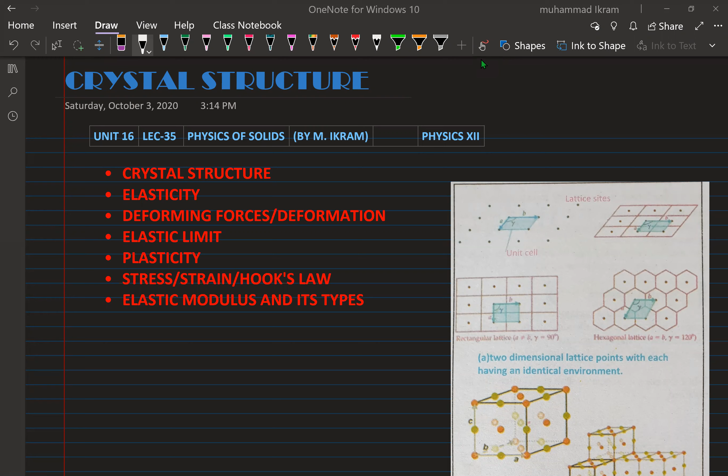Today is our lecture number 35, Unit 16, Physics of Solids. In our today lecture, I will tell you about the crystal structure, elasticity, deforming forces, deformation, elastic limit, plasticity, stress, strain, Hooke's law, elastic modulus and its types. These are today's topics. So let us start with our topic today.

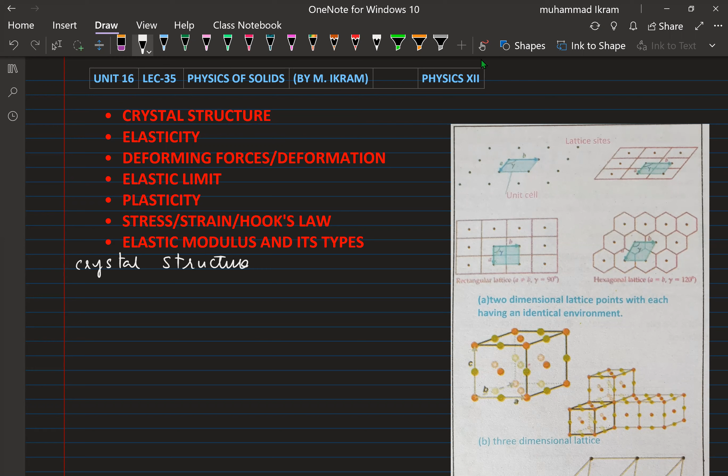First of all, about the crystal structure. The crystal structure is revealed through the process of X-ray diffraction. When the crystal or the given substance is exposed to X-rays, then the structure can be revealed. This process is known as X-ray diffraction.

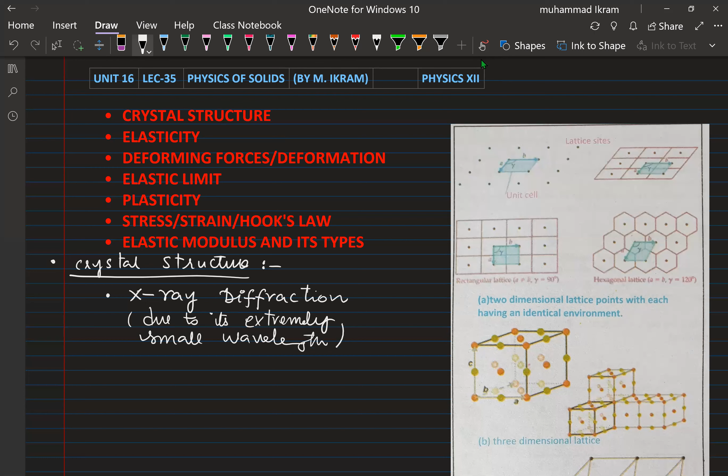The question is why we use X-rays as a probe to reveal the structure of crystals or solids. The reason is that the wavelength of the X-rays is extremely small. Due to its extremely small wavelength, they are used to probe the structure of the solids.

Why? Because in solids, the intermolecular spacing is nearly equal to the wavelength of the X-rays. The lambda is equal to the intermolecular spacing, d. So this is one of the reasons that we use X-ray diffraction.

First of all, I will tell you that the crystal structure is obtained when a basis is added at each point. Later on I'll tell you what a basis is; this is why I underline it here. When a basis is added at each point, then we obtain the crystal.

So about the crystal structure, we can say that any crystal structure equals the crystal lattice plus the basis. They form the crystal structure.

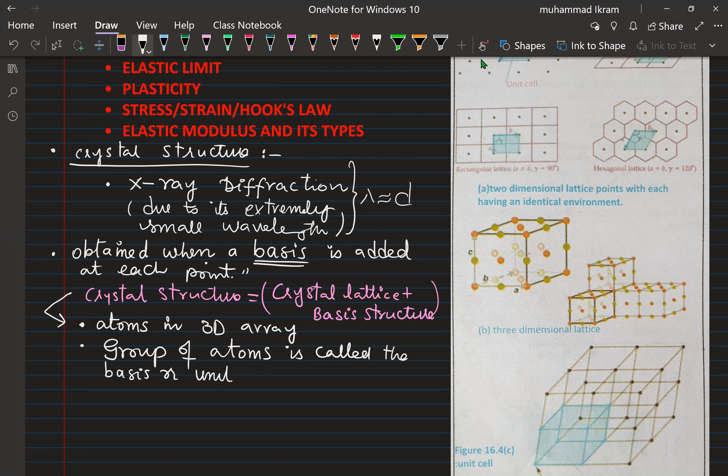So the group of atoms in this 3D array is called the basis or unit. As you see here in this diagram, this is a unit cell; later on I'll tell you what it is. This is the basis in 2D, and here it is in 3D, this whole one. This is called the basis or the unit.

This is why I told you that crystal structure is equal to a crystal lattice, which I will explain later, plus the basis. The basis is the group of atoms, like this one: this atom, this atom, this atom, and this atom. This group of atoms is called the basis, or sometimes the unit. You must remember this.

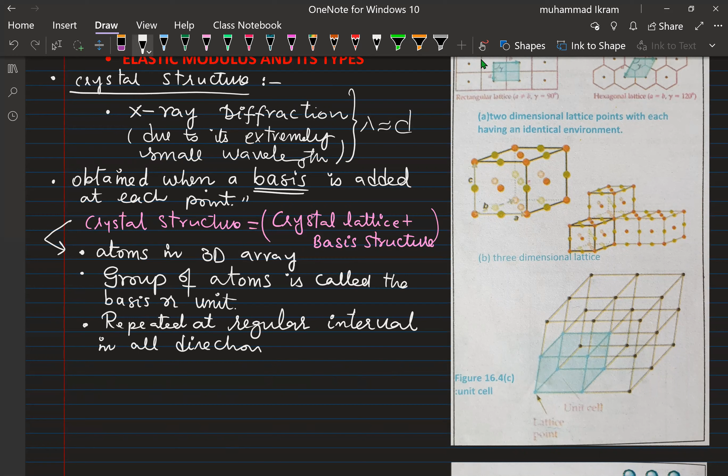Now this basis is repeated at regular intervals in all directions.

So here you see that this is repeated. This is a unit cell, and in a two-dimensional system it is repeating itself, here, here, and here. So there is repetition. The bases are repeated at regular intervals in all directions.

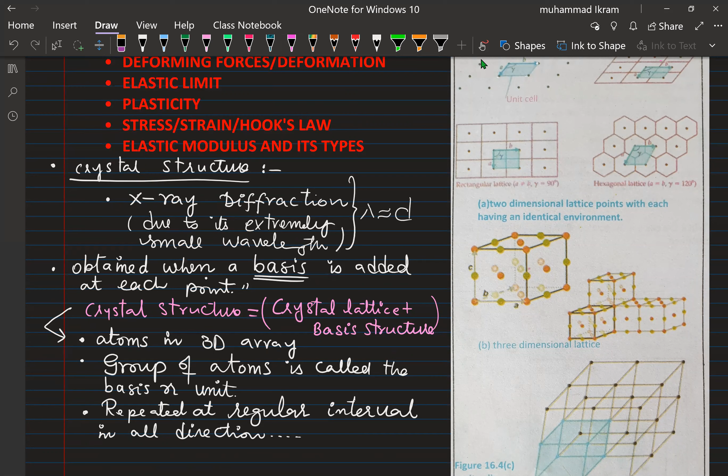Here you see in the three-dimensional structure also, it is just repeating itself in all directions for the given crystal. So this is one very important point.

The second important point is that for the geometrical analysis, an imaginary array of points in space is introduced. We introduce an imaginary array of points, which I will explain also. An imaginary array of points in space is introduced.

This, for this geometrical analysis, this array of points, it replaces what? Replaces the basis. So instead of the group of atoms, we just use a point in space. So in fact, these points are dimensionless and shapeless entities. These are what? Dimensionless and shapeless entities, which represent the given unit.

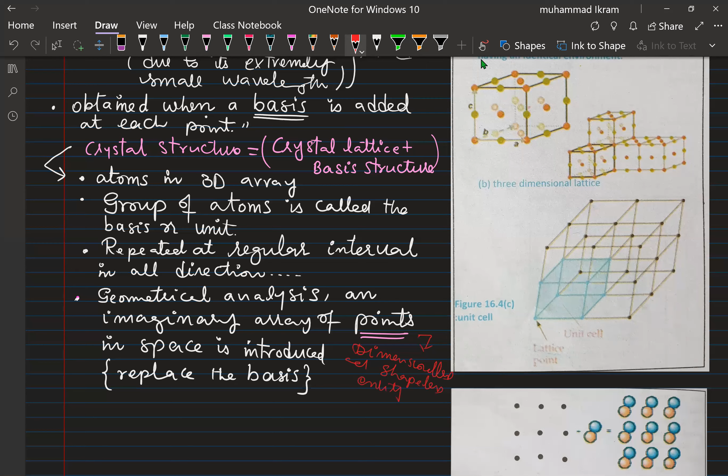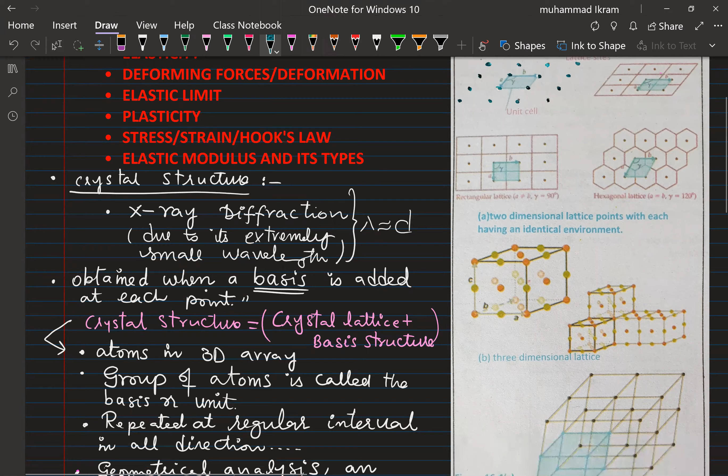So here you just see, look, the geometric array of points. Here you see these points. Look, this point, this point, this point. So actually these points replace what? The bases. And you know, as I told, bases are the units, basic units. So for their clear geometrical interpretation, we replace bases by points, right? Then this together all form the lattice.

So we introduced a term here. The term we call the lattice. This is also very important, lattice and a lattice site. Now what is lattice? Lattice is the collection of infinite points in periodic arrangements. Collection of infinite points in periodic arrangements.

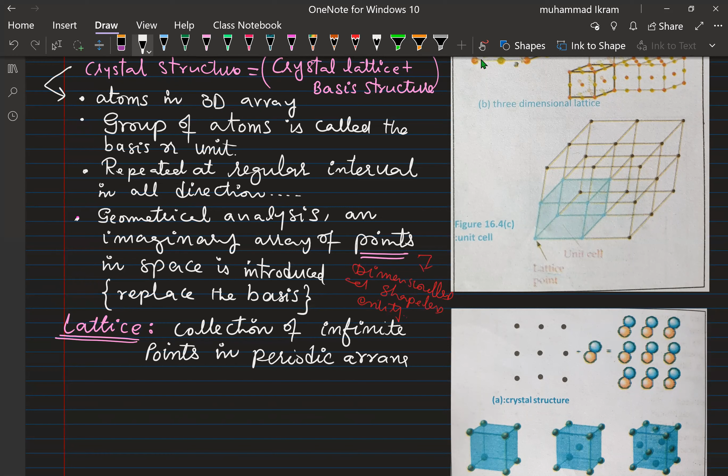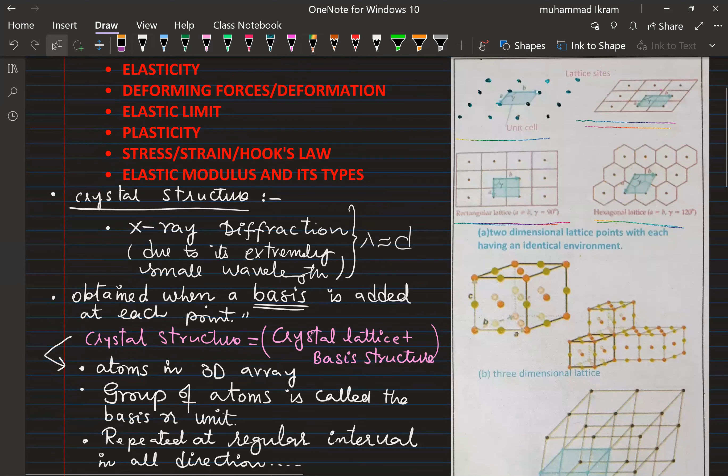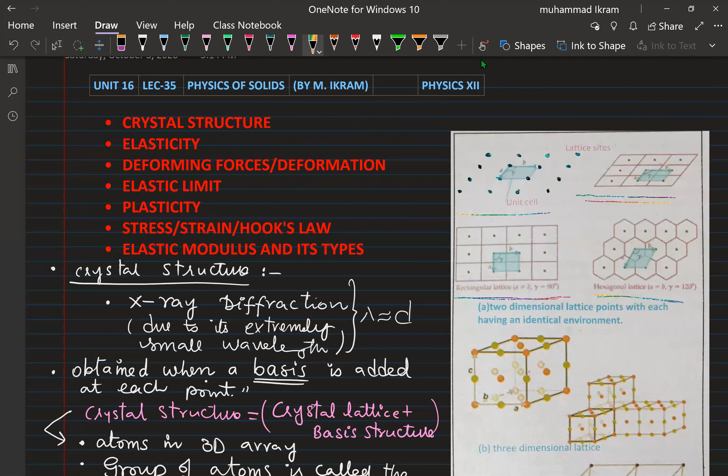Let me create some space for myself. Okay, so this is the collection of infinite points in periodic arrangement. So here you see that, look, this is the two-dimensional lattice. This whole infinite array of points is called the lattice. So this is the lattice in 2D, and we have the lattice in 3D also. Each point, which we defined earlier, shapeless and dimensionless, is called the lattice site. So lattice is the collection of infinite points in periodic arrangements, where the lattice sites,

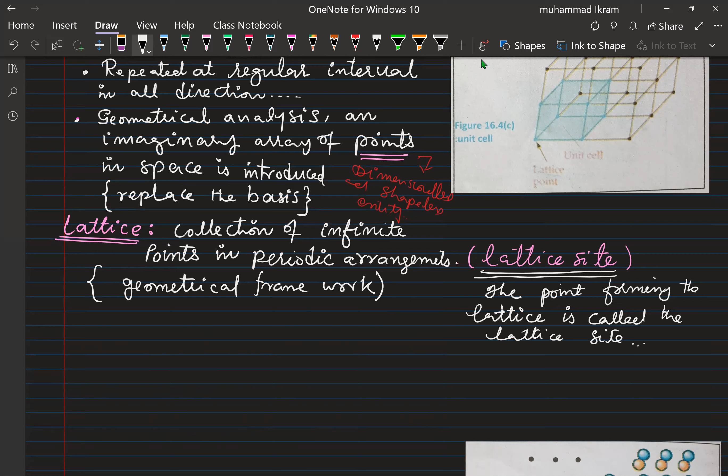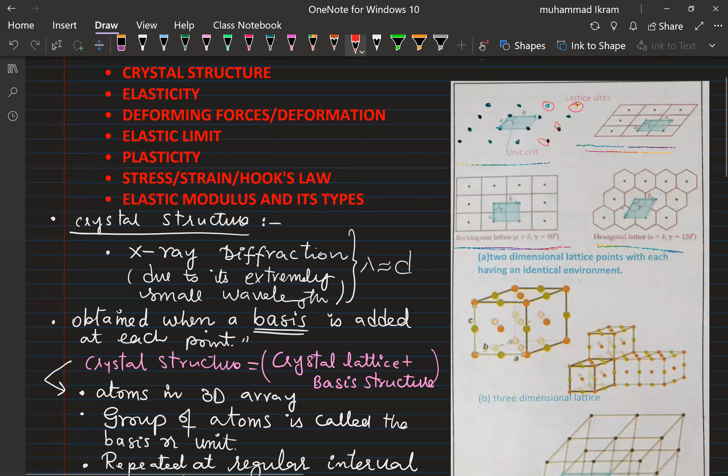Now what is this lattice? First let me tell you that the lattice is in fact the geometrical framework for the crystal structure. So the lattice site, as I told, the points which form the lattice are called the lattice sites. So lattice site is what? The points forming the lattice, which contribute to the lattice, are called the lattice sites. So here you see, as I mark it, this one, this one, this one. Here they are called the lattice sites. Clear?

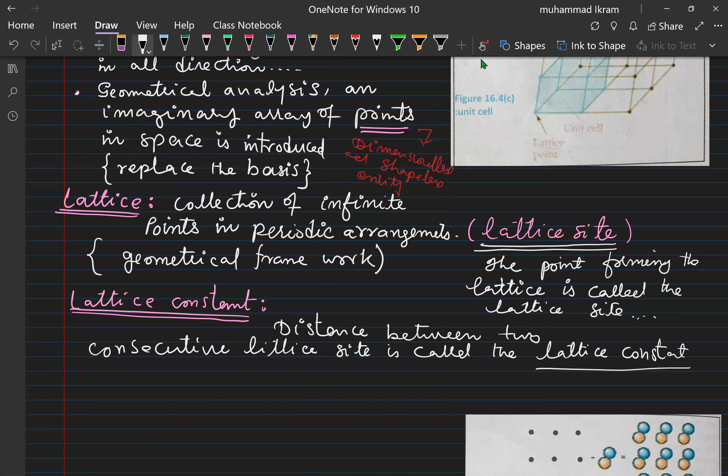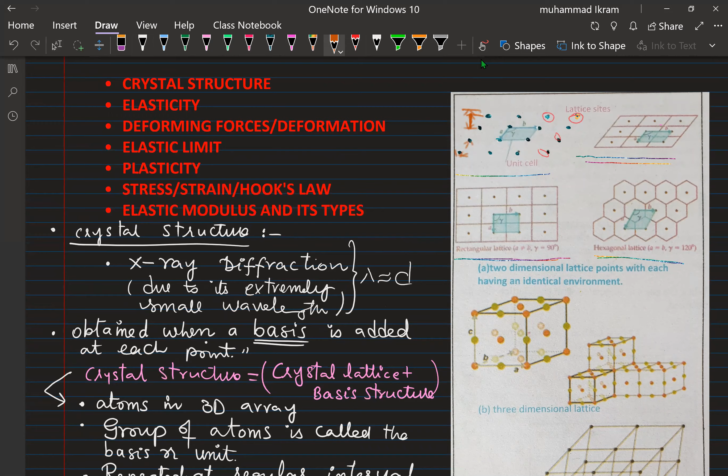Then there is another important point, and we call that the lattice constant. Now, what is the lattice constant? The lattice constant is the distance between two consecutive lattice sites. It is this lattice constant which is comparable to the wavelength of the X-rays. This distance, see here, this to this distance, is called the lattice constant. Similarly, this one and this one. So these are called the lattice constants, right?

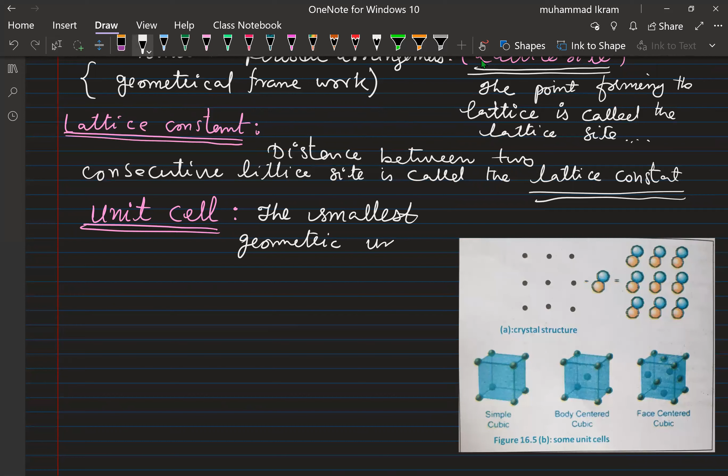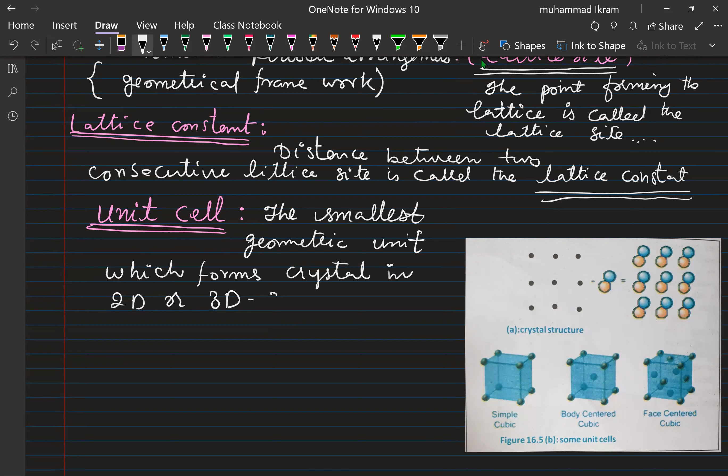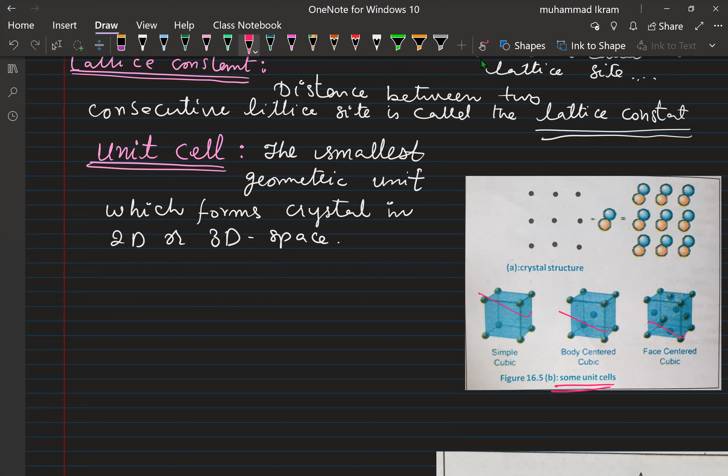Then there is the unit cell. Another important point, most probably the last point contributing to the crystal structure, is the unit cell. So unit cell is the smallest geometric unit which forms a crystal in 2D or 3D space. Okay, so here these are called the unit cells. This is the simple cubic unit cell, this is the body centered cubic cell, and this is the face centered cubic cell. Clear? So that is all about the crystal structure.

Right now, apart from the crystal structure, we have the elastic moduli.

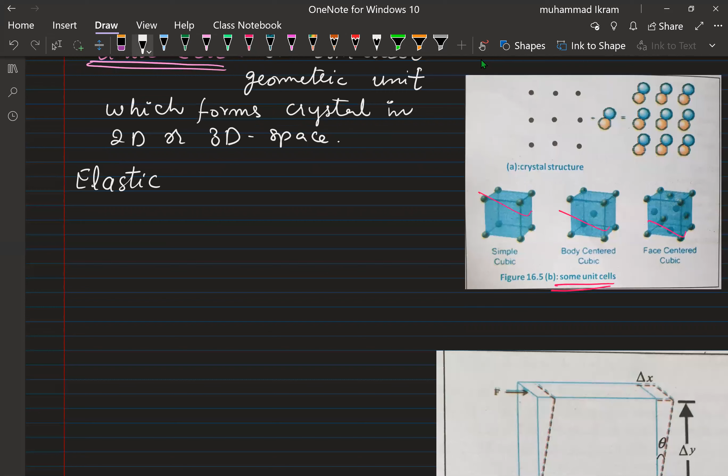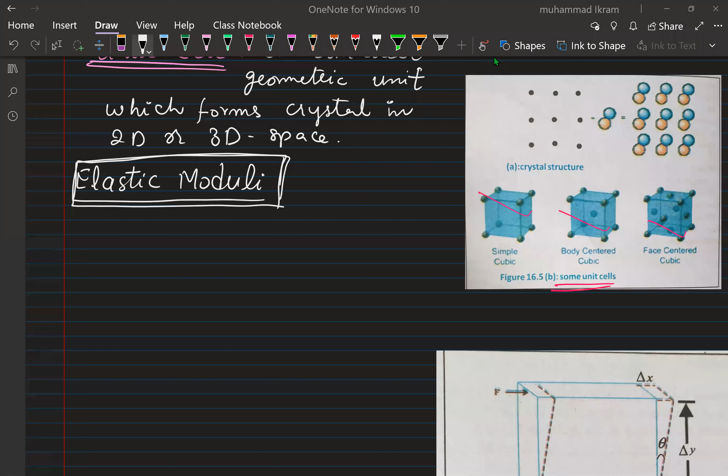Elastic modulus. Now we want to study the elastic moduli, right? Here, how the given crystal responds to stress, like that. Here we need to know about the elasticity, and I'll not be explaining elasticity to you too much because you already know about elasticity.

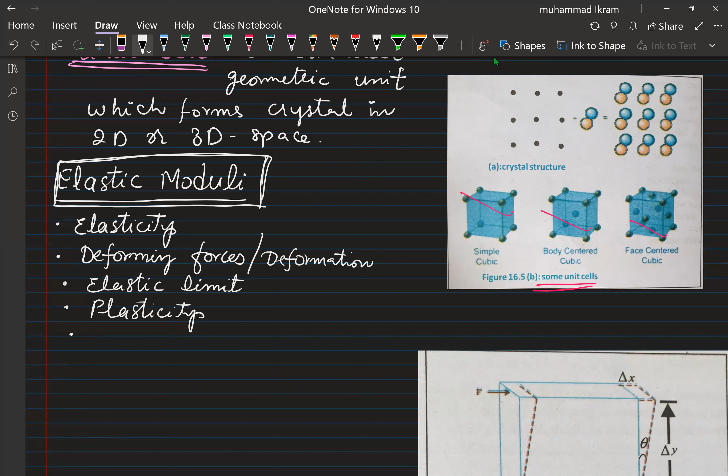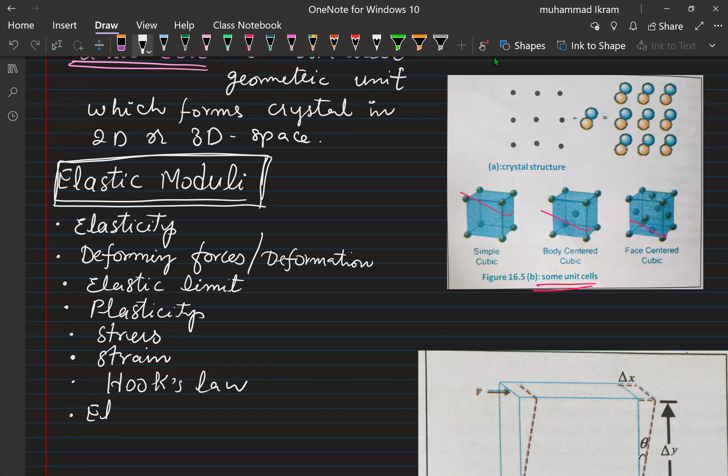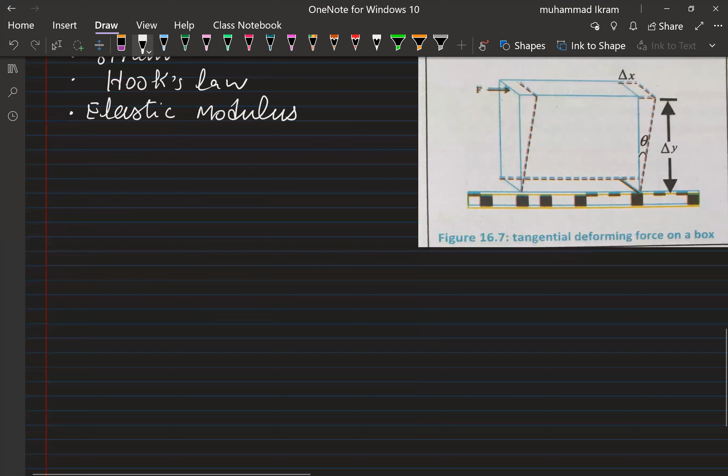And then there is deforming forces, and then deformation. Then there is deformation, and we have the elastic limit also. The elastic limit, and we have the plasticity, right? And we have the stress and strain. These are very important points. Stress, strain, Hooke law, and the elastic modulus and its types. So we will discuss those things here, inshallah, in some detail.

Now, what is elasticity? Elasticity is that property of a substance by virtue of which it can regain its original shape and size when the deforming force is removed. Now, what is this deforming force? Deforming force is the force which has the ability to distort the shape or size of an object. We call that deforming force.

In solid state physics, we call this deforming force stress, right? So the deforming force is in fact a kind of stress, and deformation is the change caused by the deforming force. And this deformation, you have studied in class 9, is in fact the strain. So almost all materials are elastic in nature. The elasticity of the material depends on the nature of the substance. Different substances have different elasticity. For example, steel is more elastic than rubber.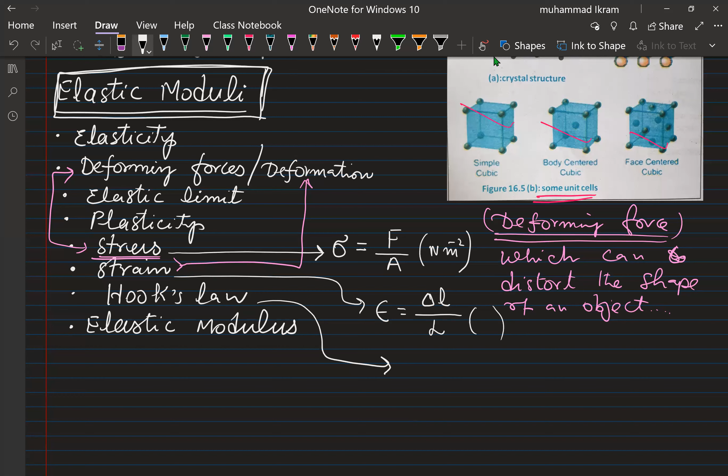Then comes Hooke's law, and you are very familiar with it, but I will explain Hooke's law, inshallah, in detail in the coming lecture. Hooke's law tells you that within the elastic limit, the strain produced in the object is directly proportional to the stress applied, right? So that is Hooke's law.

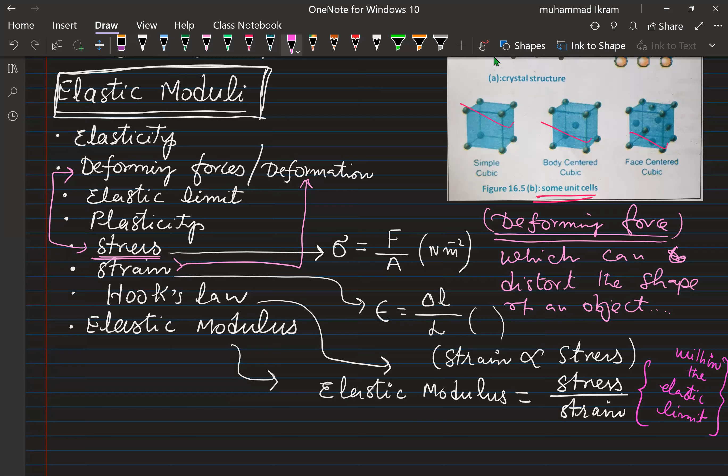And the elastic modulus is the ratio of stress to strain. So elastic modulus is the ratio of stress, any kind of stress, to strain, any kind of strain, right? But remember that this all happens within the elastic limit. Within the elastic limit, stress and strain are directly proportional to each other. Okay, now this elastic modulus.

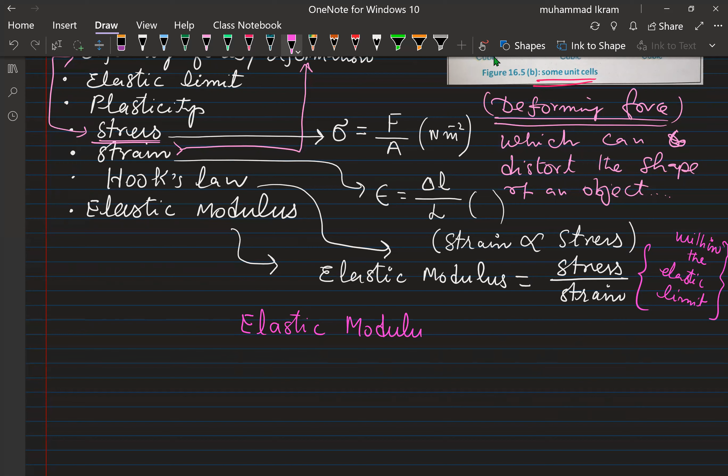There are three types of elastic modulus, right? One we call the Young modulus, or simply we denote it by Y. We have the shear modulus, or modulus of rigidity, which I will explain in a bit more detail because it wasn't in your class 9. The shear modulus is denoted by S, and it is caused by a force tangential to one of the faces of the object. It is caused by what?

Caused by our shear strain. We can say that it is because of the shear strain, and that shear strain is caused by a force tangential to one of its faces, so this comes due to the tangential forces.

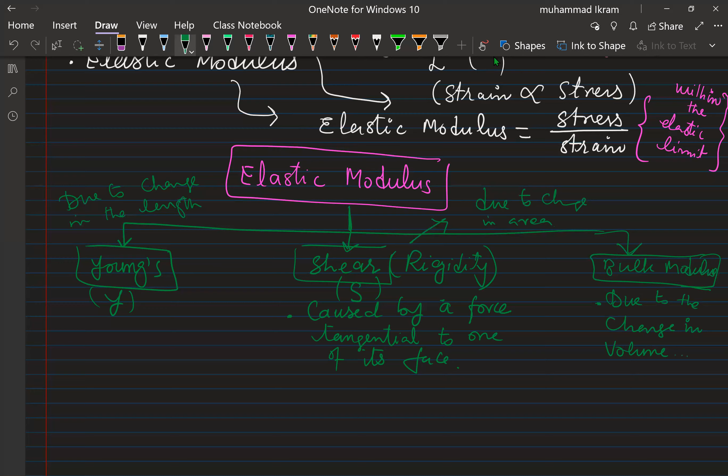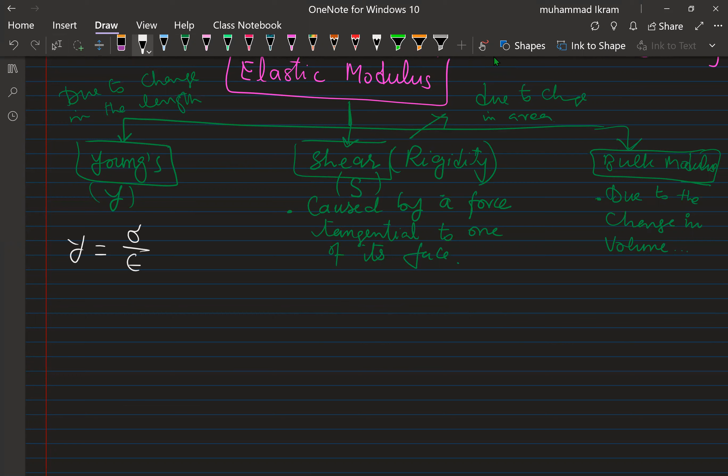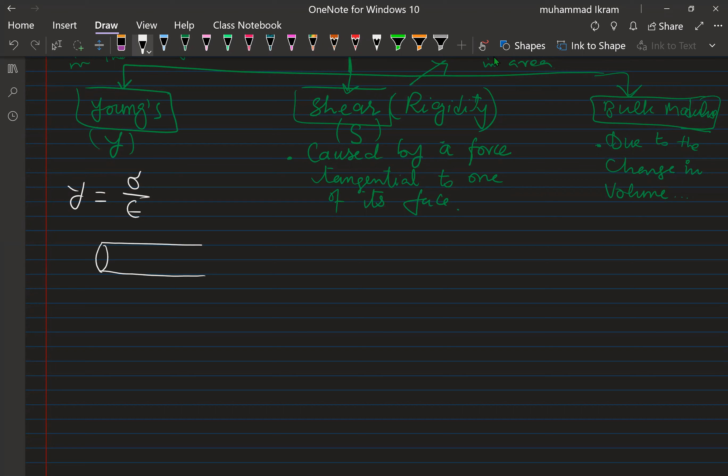Now, what is the Young modulus? The Young modulus is the ratio of stress to strain, provided that the elastic limit is not exceeded. So in order to explain the Young modulus, let us consider an object, for example, a rod of length L. If it is subjected to a stress, force per unit area, and this is the cross-sectional area of the object, right? And here you have the force also.

So here a force acts per unit area; it can be stretching and it can be compression also. Here I demonstrate it as stretching. When you stretch the object, since volume remains the same, the length increases and the area of cross section decreases, under stress, force per unit area. There is an increase in the length of the object: the original length is L naught and the final length is LF. So the change in length, delta L, is LF minus L naught.

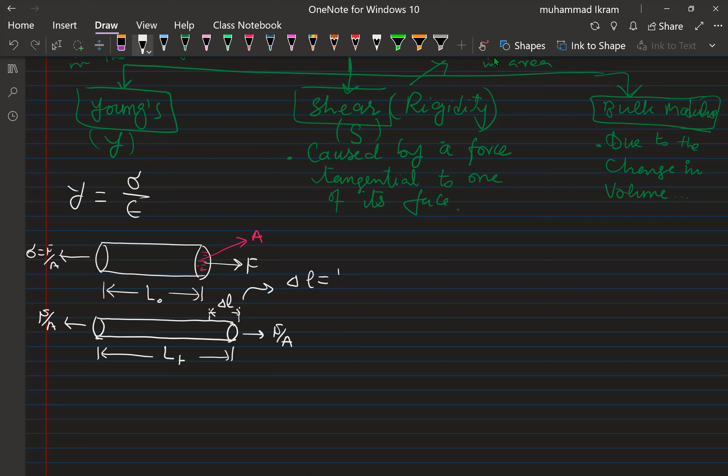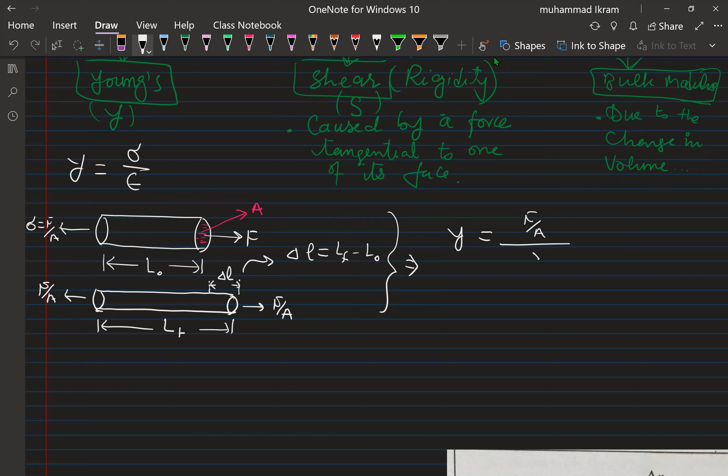Okay, so the stress is force per unit area, and the strain is the change in length to the original length of the object, L naught, or simply write L to indicate the original length. So force per unit area, and then there is this delta L by L, right? This Young modulus determines the strength of that material.

So your Young modulus is FL divided by A delta L, right? That is the Young modulus, where delta L is the change in length. So you can find the change in length as delta L equals FL divided by AY. This determines the strength of the material, clear? So it is different for different substances.

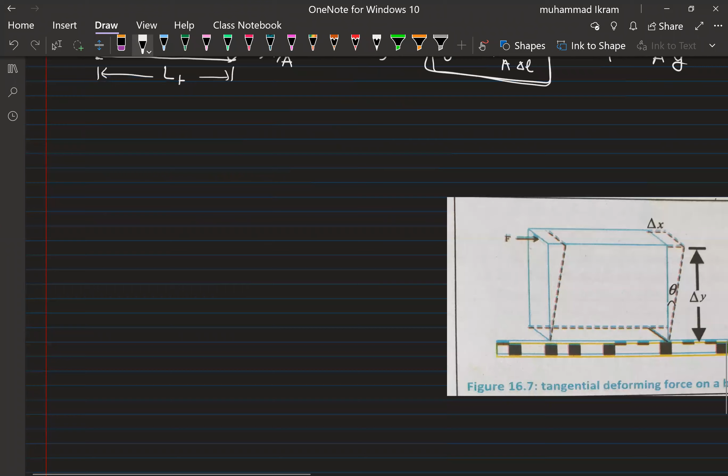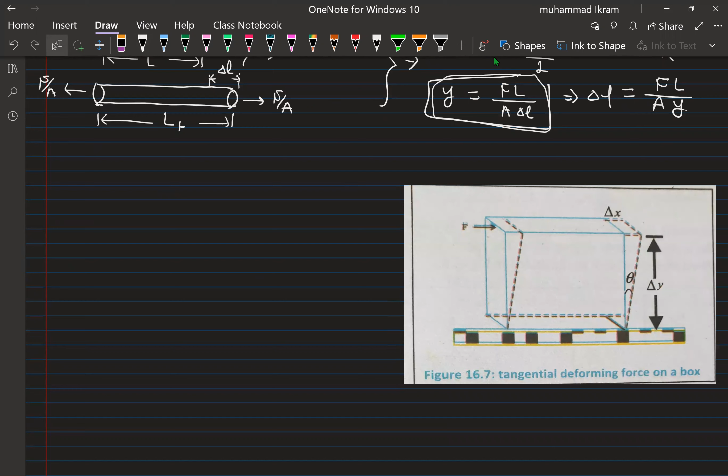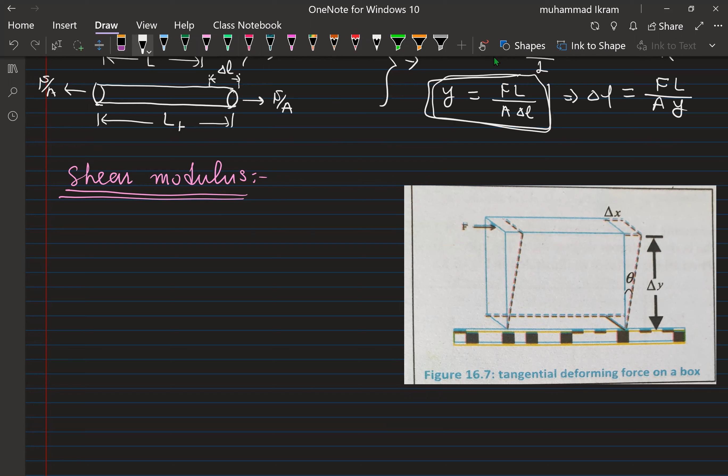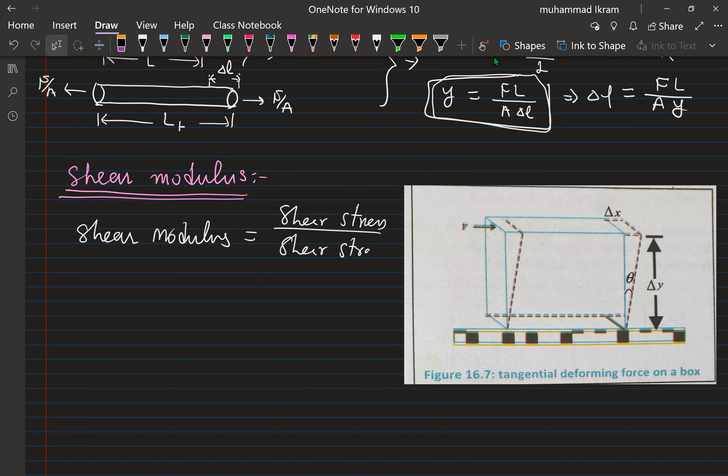Now the next one, which is important, is the shear modulus. As I told, the shear modulus is caused by tangential forces, which act parallel to one of the surfaces of the object, as is clear from this. Now the shear modulus is the shear stress divided by shear strain, right? The shear modulus is denoted by S, here is the shear stress, and here is the shear strain.

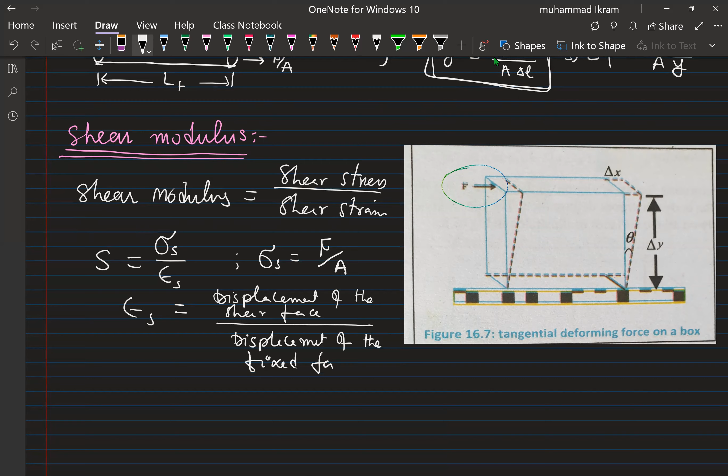Now what will be the shear stress? The shear stress will be equal to this force F per unit area of the object, like this one. And the shear strain can be written as displacement of the shear face divided by the displacement of the fixed face. So here in the diagram, under the shear stress, look at this displacement.

This is the displacement of the shear face, right? The displacement of what? The displacement of the shear face. Why? Because the force is applied here and it caused this displacement. So you see that this displacement is in fact delta x, right?

And for this reason, see here that there is the delta y, the displacement of the fixed face, as you see. This is the fixed face. So this displacement is what? This displacement is delta y.

Now if you just look to the triangle, and if I just make it like this, as you see here, then this is theta, this is delta y, and this is delta x. So we see that tan theta is actually equal to delta x by delta y, right? So here this is nothing but the tangent theta, right?

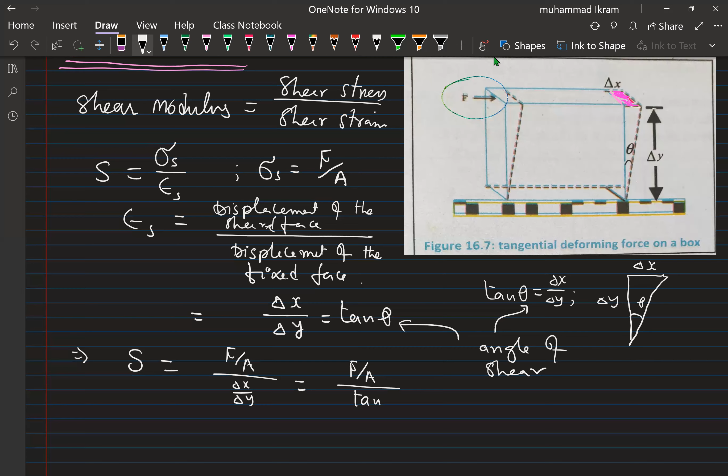We call this theta the angle of shear. We call this the angle of shear, and because of this angle of shear, we can write that S, the shear stress, is equal to force per unit area. And since it is equal to this delta x by delta y, instead of this I can write F/A over tan theta, right? Or in other words, we can write that S equals F/A tangent theta,

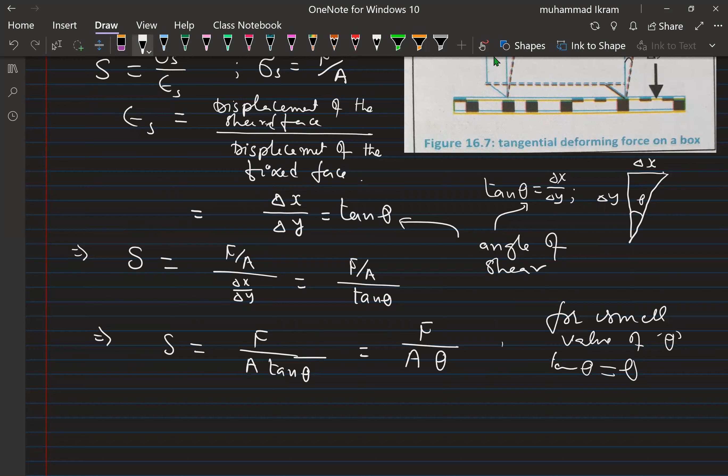right? Or we can write that S equals F by A theta, where for small values of theta, tan theta is always equal to theta. So this is how we can calculate the shear modulus, right? For the bulk modulus, this is very easy, and I don't want to explain it because this is what you can know from your class.

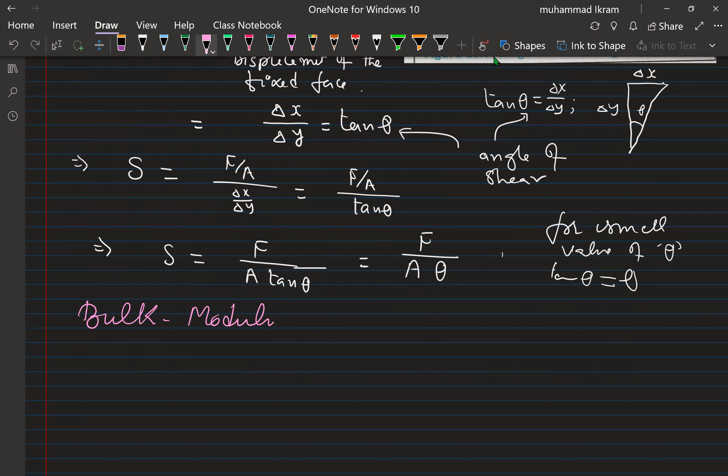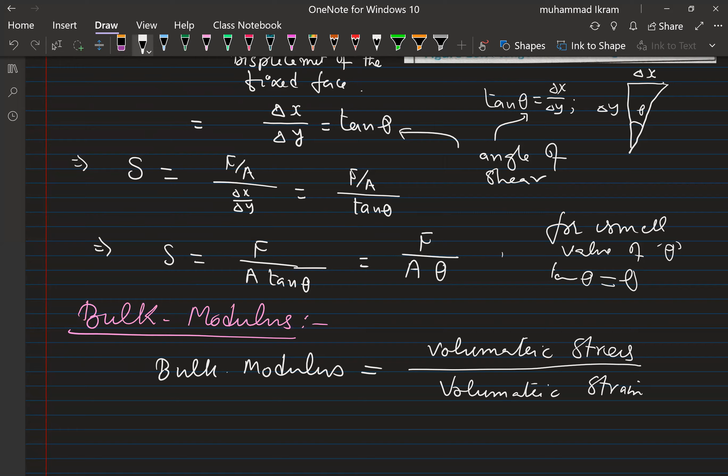Bulk modulus. The bulk modulus is the ratio of what? The bulk or volume stress. The bulk modulus is the ratio of volumetric stress to the volumetric strain. And what is that volumetric stress? Again, that is force per unit area, and the strain is the change in volume per unit volume. So the fractional increase in the volume of an object due to volumetric stress is known as volumetric strain. And they are all measured in the same unit, remember.

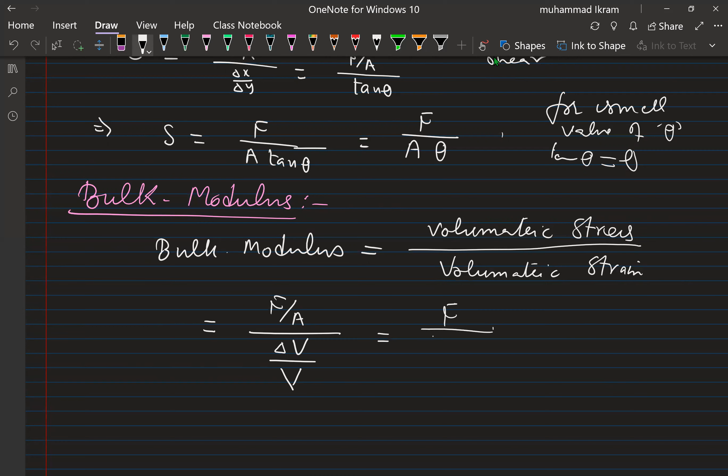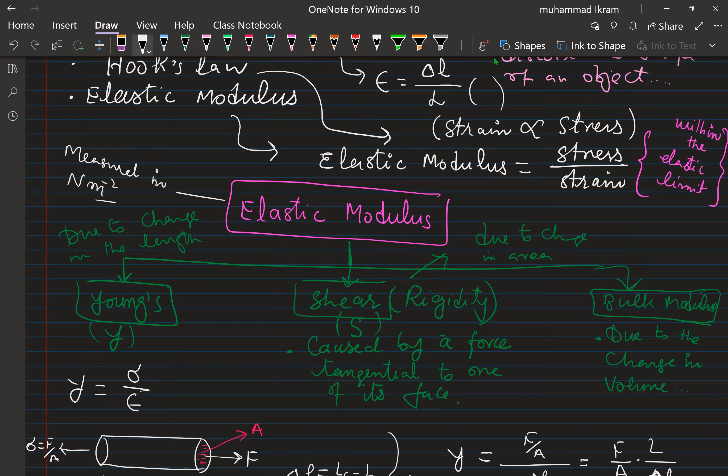Now look, see here, we can also write it in terms of pressure. If you call force per unit area pressure, then it will be delta P divided by delta V by V. Whether it is Young's modulus or bulk modulus, it can be both positive and negative. Positive when there is stretching, and negative when there is compression, right?

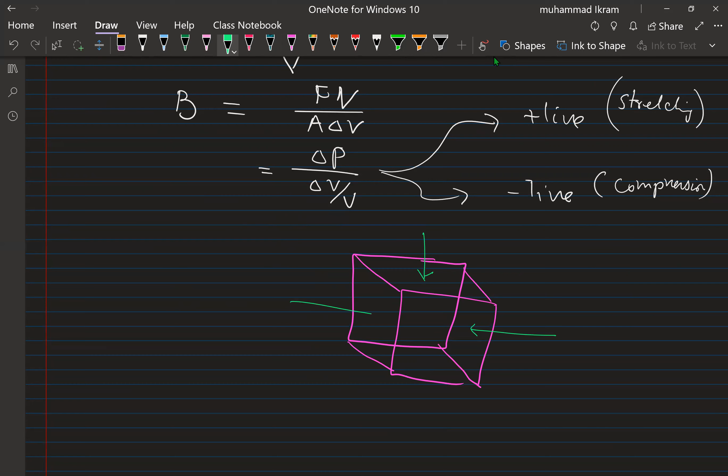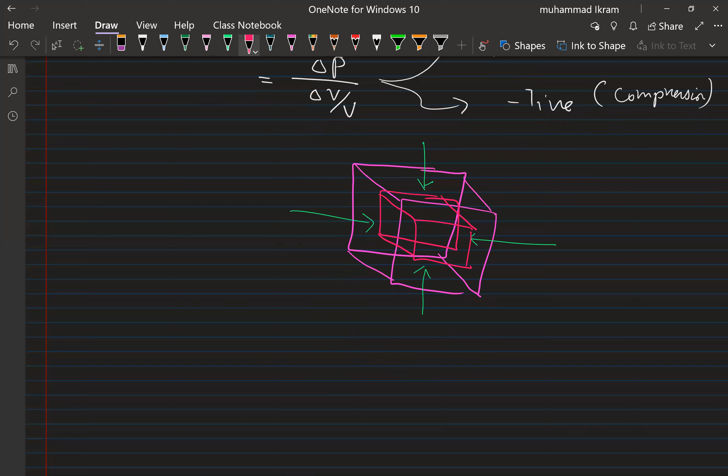Because if you apply forces from all sides, for example, see here, if you have this object like this, and the force is acting on it here, here, here, and here, what is going to happen? The object is going to compress, and the new shape could be like this. So here you see that the object is being compressed, and this bulk modulus will be negative, right?